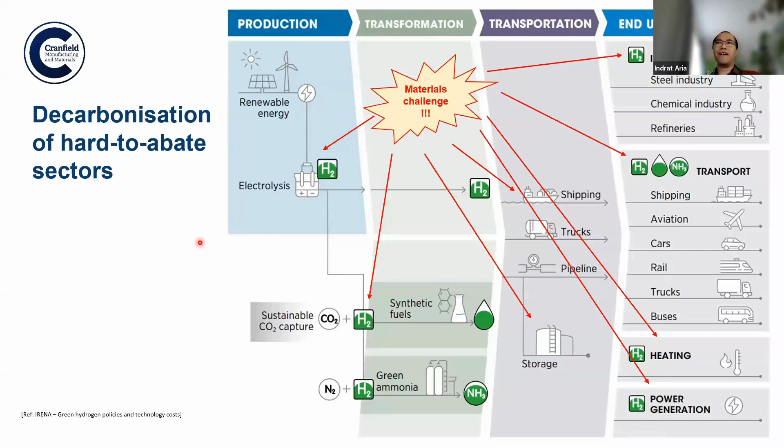I will talk more about the very end points, the beginning and the end. I only have half an hour or so, so I will focus on electrolysis and power generation. Electrolysis is basically splitting water into hydrogen and oxygen. Power generation is recombining hydrogen and oxygen into electricity using a fuel cell. But that doesn't mean we don't have materials challenges everywhere else. We do have challenges in methane synthesis or green ammonia production.

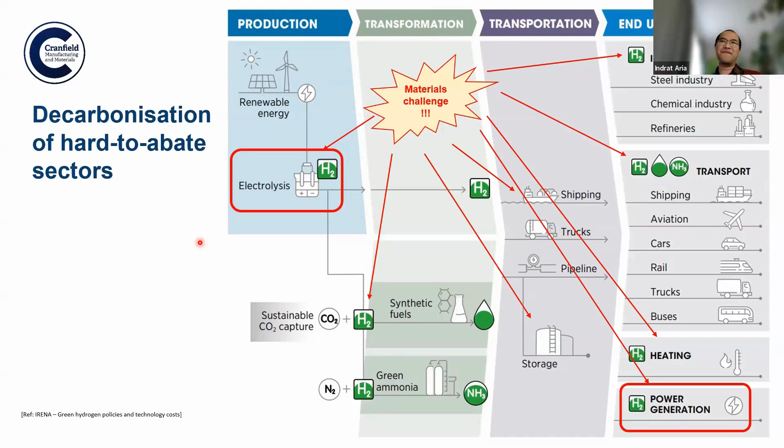In storage, we have materials challenges because hydrogen is one of the smallest, lightest molecules, so it will seep out from the storage, what we call permeation. It embrittles materials, it embrittles steel. If you have steel with hydrogen, the hydrogen goes into the steel and the steel becomes very brittle. But I will not talk about that because I don't have enough time. I'll just focus on electrolysis and the fuel cell.

The reason I want to focus on that is what I call democratization of the hydrogen economy. Dr. Sila already mentioned that many projects are envisioned or ongoing in Indonesia for generation of hydrogen. But I see it slightly differently. Those are large-scale projects, but the good thing with hydrogen is that the efficiency of hydrogen production by electrolysis, water splitting, is the same whether you go upscale or downscale, whether you start with a very small benchtop electrolyzer or very large gigawatt-scale electrolysis. In fact, you can couple it with any kind of power generation.

Just an example here, I don't think this exists, but in my mind, let's say you go to Cirata, there's a floating solar PV, right? So you can tap the electricity directly from the PV. Underneath the PV, you have the water, plenty of water, and then you couple them together, you generate hydrogen, and then the hydrogen can be used as a cooking fuel, as an agriculture fuel, or you generate electricity directly, which can then benefit directly the community surrounding it.

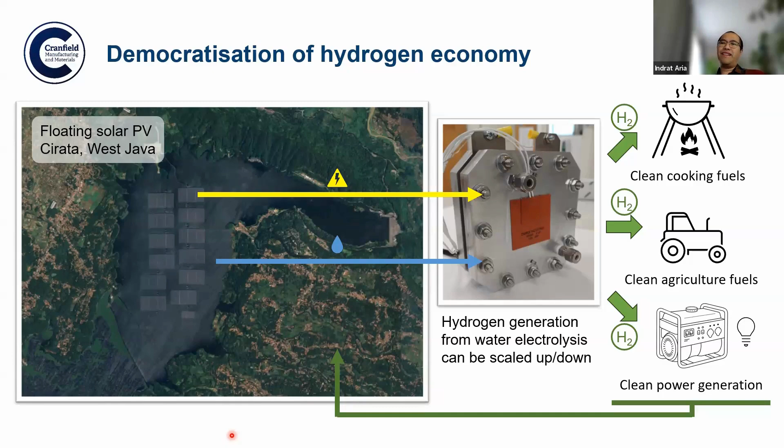And so you don't have to generate and transport the electricity hundreds or thousands of kilometers away. The local community can directly benefit. Now, all of this can make sense if we address the main issue with electrolysis. The main issue is practically the cost of the materials. Priscilla already mentioned that everything is so expensive with hydrogen at the moment.

Yes. So 95% of hydrogen produced in the world is coming from blue hydrogen. So this is basically methane reforming or coal gasification coupled with carbon capture to produce hydrogen. So the hydrogen right now has a cost about, or at least the target for hydrogen cost is between 1.5 and 2.5 US dollars per kilogram. If you use green hydrogen, so hydrogen produced by electrolyzer, it costs about 4.5 to 6.5 US dollars per kilogram.

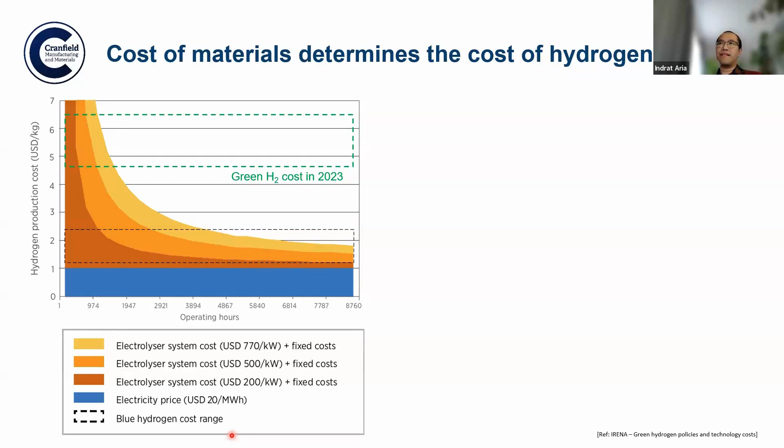The reason for that is because of the very expensive cost of the electrolyzer. And the electricity price, if we say it's a fixed price of 20 US dollars per megawatt hour, then all depends on the cost of the electrolyzer. And if we break down the cost of the electrolyzer, we can see that 34% of the total cost of hydrogen production is coming from the materials, the catalyst, the porous transport layer, and then the membrane electrode assembly.

So those are on the right-hand side that I highlighted. CCM, catalyst coated membrane, PTL, that's a porous transport layer, MEA, that's a membrane electrode assembly. So just these three components basically account for 83% of the capex, capital expenditure of the electrolyzer. So this is key, because if we can drive down the cost of these three components, we are good.

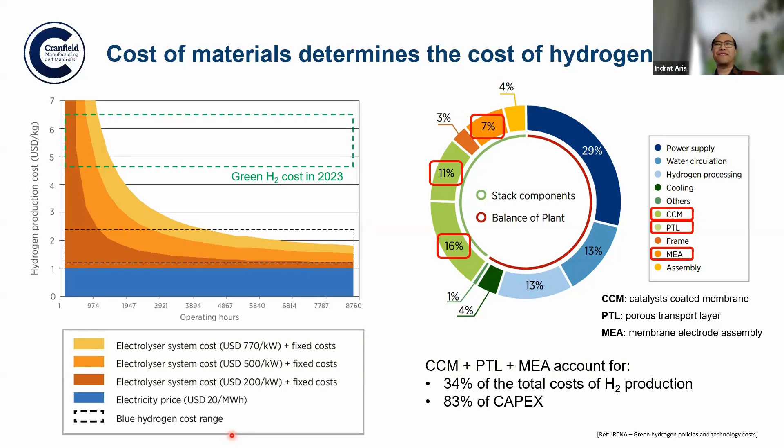We can reduce the capex, the capital expenditure. We can reduce the hydrogen production cost. If the cost is low, everyone's happy. Everyone can use the hydrogen. Right. So I'll mention the electrolyzer and fuel cell. For me, they are the same thing. The only difference is what is the input and what is the output? What do you put in and what do you get?

Right. So, in fact, in my lab we have a cell that can be used for electrolyzer or fuel cell depending on what is the input and the output. On the left hand side, this is the electrolyzer. Basically, you have an anode, cathode, and electrolyte in between. The input is water and electricity. When you power this, you then generate oxygen and hydrogen. So it's basically splitting water.

Now, if you reverse the polarity or the input and output, let's say you put in oxygen and hydrogen, what you get is water. You recombine the hydrogen and oxygen into water and electricity. So for those of you who are interested more in the chemistry side, you can see that this is basically the same thing. Like you have a cathode for the electrolyzer, you generate hydrogen. On the anode, you generate oxygen.

And then if you reverse, you have a reduction of oxygen into O2-, or you have oxidation of hydrogen into protons, H+, on the cathode and anode respectively for the fuel cell. And so those are the same thing. So hence for this talk, I interchangeably say electrolyzer or fuel cell.

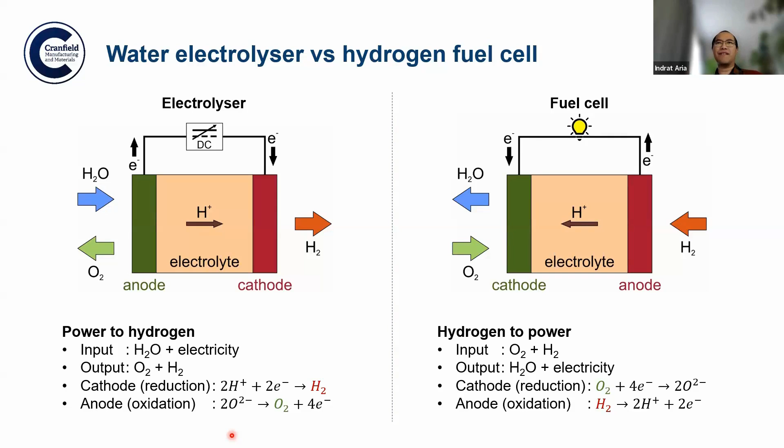So if I say this is for fuel cell, that also applies for electrolyzer. If this is for electrolyzer, this also applies to fuel cell, because in reality they are the same thing. The only difference is just the input and the output, what you put in and what you get. Now, how does it look? This is a benchtop electrolyzer. Basically, in the center there, this is a fuel cell or electrolyzer that has been opened.

So you have an end plate, you have an electrode, and then you have a bipolar plate with a flow field. The flow field is basically to distribute the water. So you can see there's a serpentine-like structure, or this interdigitated flow field. So basically, it's just to distribute the water, and then this will be in contact with the microporous layer. And the microporous layer or gas diffusion layer is basically like a foam where you distribute all the gases or all the water. And sandwiched in between is the MEA, membrane electrode assembly.

Now, whether this is a benchtop or a very large scale, they are basically practically the same. The difference is that you can stack this, just like a battery, you can stack multiple cells to get a higher potential, higher voltage, or higher current, for instance.

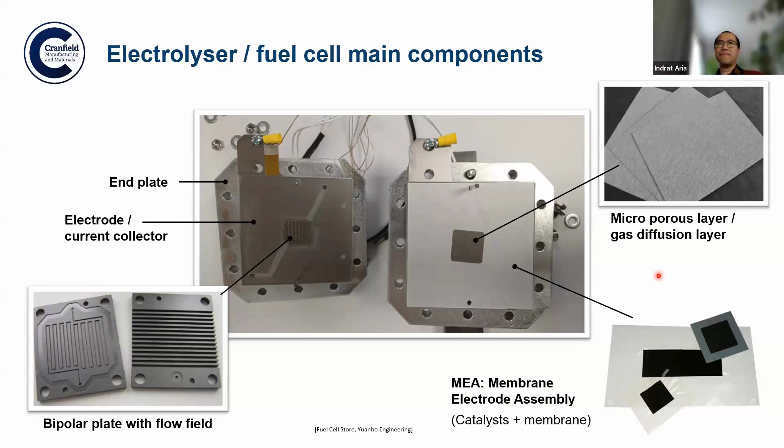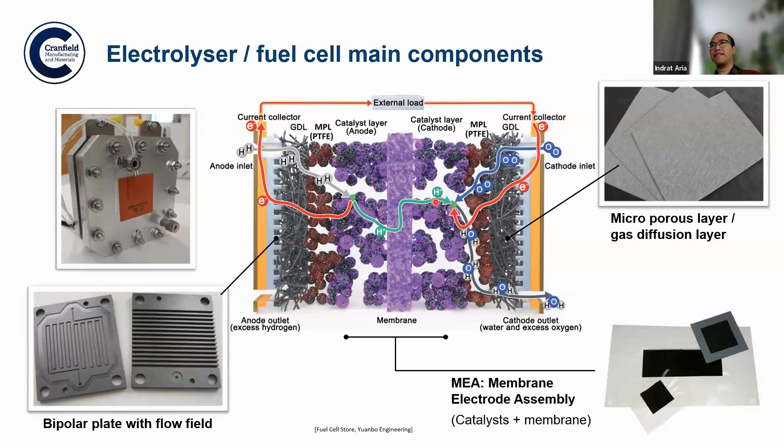So when all of these are stacked together, you can see the electrolyzer on the left hand side. Gas will be coming in from the left or on the right. So for fuel cell, hydrogen on the left and oxygen on the right. And then it will be split by the catalyst and then exit as water. So let's take a look. What are the components? So basically how it works is just electron and ion transport. Everything about fuel cell or electrolyzer is electron and ion transport.

Let's take an example here, a fuel cell. If you have hydrogen on the left hand side as the inlet, and then oxygen on the right hand side as another inlet, hydrogen will travel from one of the inlets through the gas diffusion layer, through the microporous layer, and reach the catalyst of the anode. Upon reaching the catalyst, the hydrogen will be split into protons, right?

And then the proton will be transported through the membrane, and this proton will recombine with oxygen that's traveling from the other inlet. The proton will recombine with oxygen on the catalyst at the cathode side, and upon recombination, it will accept the electron from the external load. So the electron is coming from the other side. The electrons are basically released when we split the hydrogen on the anode. And then the act of recombining proton with oxygen and electron results in water, and then the water will be expelled.

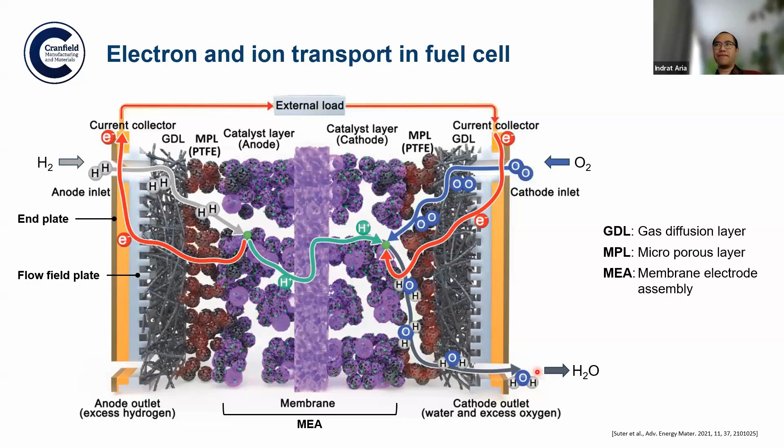So what are these materials? For the microporous layer, this is the interface between the gas diffusion layer and the catalyst. These are basically fluorinated polymer. It can be hydrophobic for fuel cell or hydrophilic for electrolyzer. The reason we want hydrophobic fluorinated polymer is that we want to repel the water. Water is the product of fuel cell, so we want it to be expelled as quickly as possible. We don't want that to create a bottleneck.

And these fiber felts are coated with platinum. This is the reason why it's so expensive. Every single fiber of this has to be coated with platinum. First of all, titanium is expensive. It's abundant, but it's expensive because it's so difficult to manufacture. And second, platinum is very expensive. Why do we need platinum to coat the titanium fiber? That's because platinum is stable in strong acid or alkaline environments, and it is oxidation and corrosion resistant.

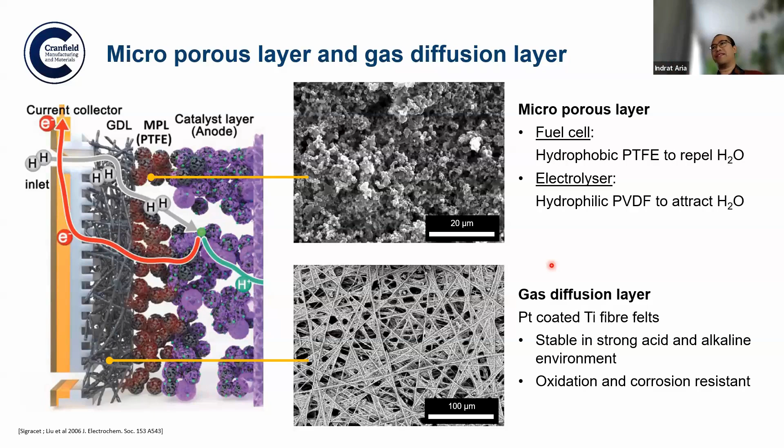Without the platinum, the titanium will get oxidized very quickly. Once it oxidizes, it becomes titanium oxide. Titanium oxide is non-conductive, first of all. And worst of all, it can be corroded. So if you put it on the anode side, the titanium will get corroded very, very quickly. Hence, you need platinum.

If you look at the heart of the electrolyzer or fuel cell, you will find the membrane electrode assembly. This is basically a membrane sandwiched by two types of catalysts, the anode and the cathode catalyst. This is very thin. The membrane itself has a thickness of about 50 microns, and the catalyst has a thickness of about 15 microns each. But without this MEA, there is no fuel cell, there is no electrolyzer. So this is the heart of the electrolyzer or fuel cell.

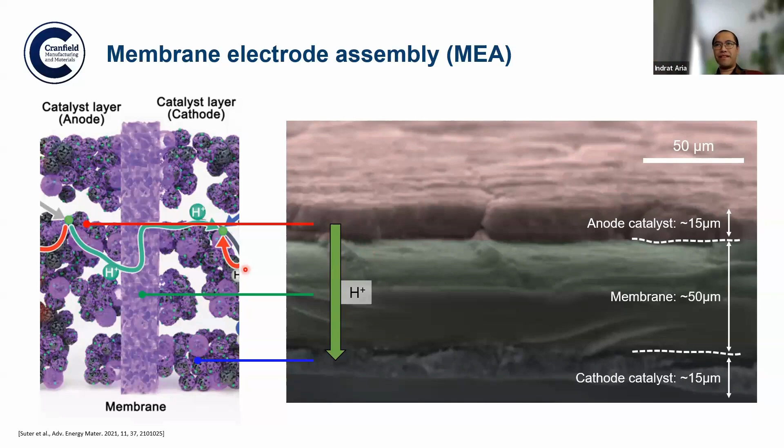This is where you have the transport of H+ or the proton for proton exchange membrane electrolyzer or fuel cell, or the OH- if you use alkaline. So this is very thin, but this is actually very, very expensive. The membrane is made of a perfluorinated sulfonic acid polymer. You perhaps have heard of it by its commercial name, Nafion or Aquivion. So this is a fluorinated polymer with a sulfonic acid terminal group at the end.

The requirement is that this has to be ionically conductive, but electronically non-conductive. So you cannot transport electrons. It has to be blocking to electrons, but it has to be conductive to ions. The challenge here is that the ionomer of PFSA is highly corrosive, highly toxic.

Right? So the manufacturing process is so difficult, such that only a handful of companies, 3-4 companies worldwide, are able to manufacture this. Hence, the cost is very high. And to make it worse, this is non-biodegradable. This is bioaccumulative, right? So PFSA is a challenging material, but without this, we don't have green hydrogen. So this is still a challenge to be overcome.

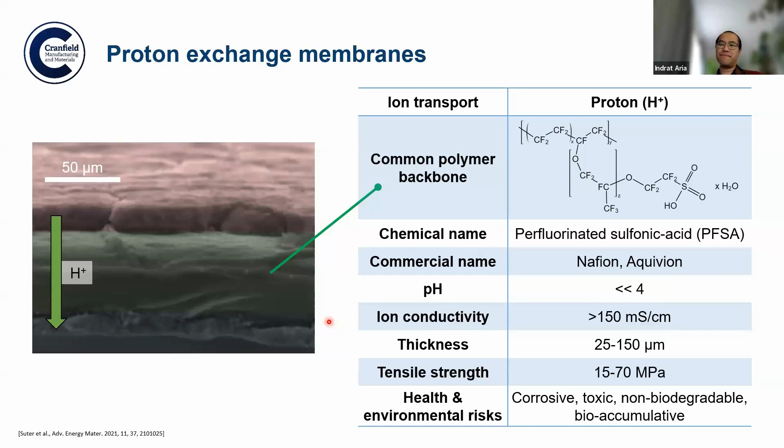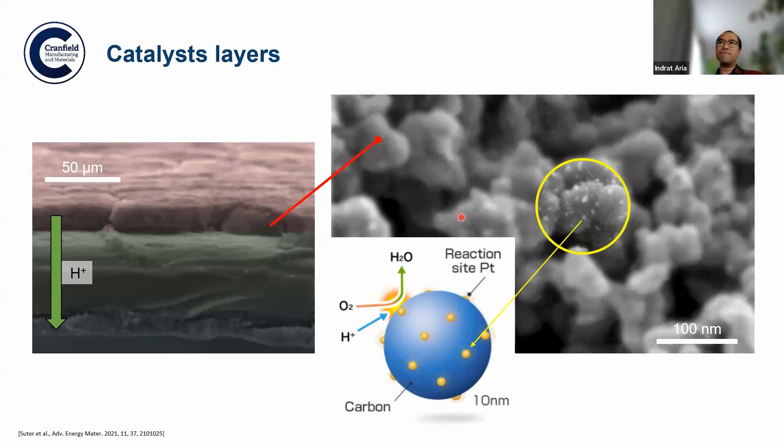Now, to make it worse, in terms of the cost, we have catalyst. Catalyst is also extremely expensive because it's currently made of expensive materials. If you look at the catalyst layer, you will see this kind of structure. These are nanostructures. You have carbon, and the bright dots here are the catalysts. So if I zoom in, most of the material in the catalyst layer is just carbon.

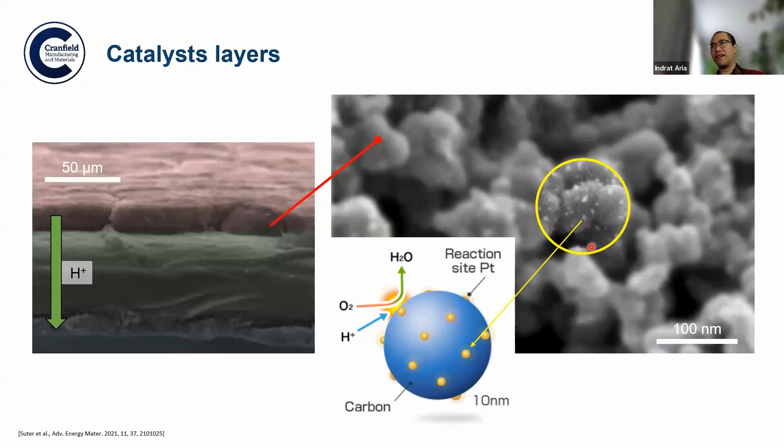Carbon is very cheap. However, this carbon is decorated by platinum. The platinum is the one that's very expensive. So the catalyst itself is the platinum, not the carbon. Carbon is just the structure to hold the platinum catalyst. Carbon is electronically conductive, hence it's a good structure to hold the platinum.

Now, the reason for catalyst is, as I mentioned earlier, you need catalyst to break down the hydrogen gas, H2, into protons on the anode side. And you need to recombine the protons with oxygen gas on the cathode side. Without catalyst, the energy to break down the hydrogen or to recombine oxygen with protons is very high. So the efficiency becomes very low.

We're talking about 20% or lower efficiency without catalyst. It just makes no sense to generate hydrogen without catalyst, and the electricity is better used for something else. But with catalyst, especially platinum, you can easily break down the hydrogen gas into protons, and then the protons can be recombined with oxygen, so that the efficiency of an electrolyzer or fuel cell is usually in the order of 80% or above. So this is the importance of catalyst.

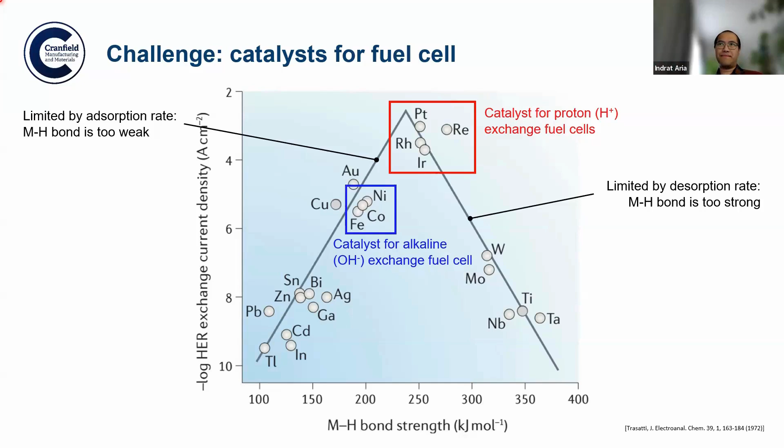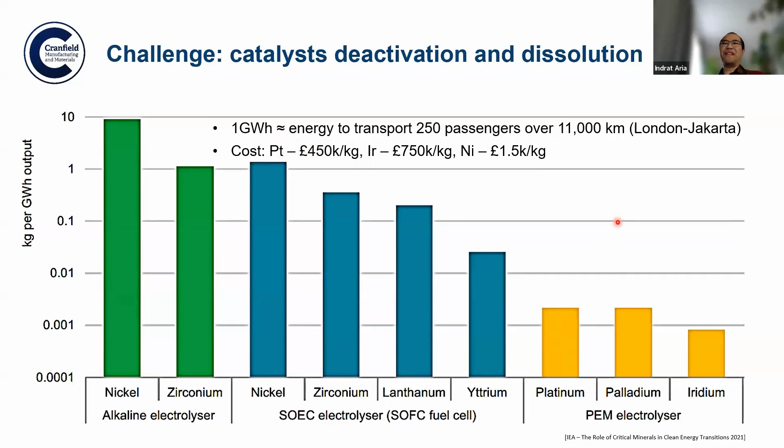However, with platinum, this is the biggest challenge. In terms of cost, yes, platinum is expensive, but nickel is more expensive because of the consumption of the material. The biggest challenge with using platinum, iridium, rhenium or rhodium is not the cost, but the availability, the abundance of these materials.

If every country, every person on Earth wants to generate hydrogen with electrolysis or use hydrogen in fuel cells, there's just not enough platinum, iridium, rhodium or rhenium for everyone. So this will create conflict materials. Nickel, cobalt or iron, even though they are more expensive because of the consumption, are more abundant, so you have plenty of them. So everyone can have access.

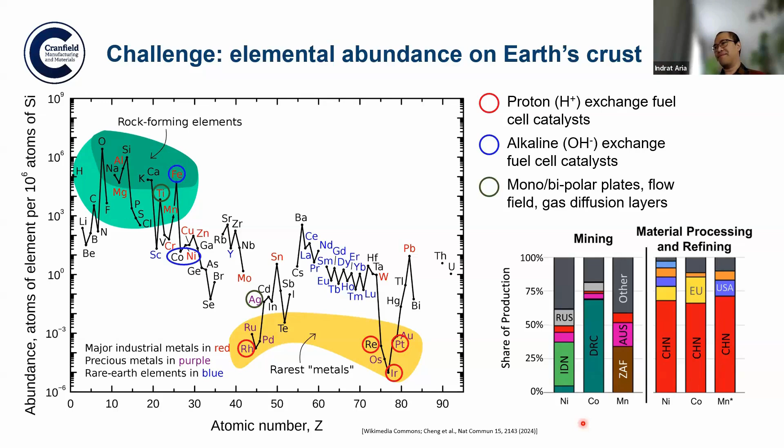The last bit I want to talk about is the activities in my lab. Because of these challenges, the high cost and unavailability of platinum group metals and the high consumption of nickel for catalysis, in my lab we focus on other abundant materials free from platinum or iridium for both the catalyst and the coatings. We want to replace platinum, for example, with niobium carbide or molybdenum carbide,

which are more abundant and cheaper. We want to replace iridium with calcium manganese oxide or nickel cobalt oxyhydroxide, which are again much cheaper and more abundant. The good thing is that because these are oxides, they are stable in oxidizing conditions. So their consumption will be much less than if we just start with nickel metal.

So if we oxidize and create an oxyhydroxide, the research is still ongoing, but we predict that the material consumption will be at least 2, if not 3, orders of magnitude lower than if we just start with nickel metal.

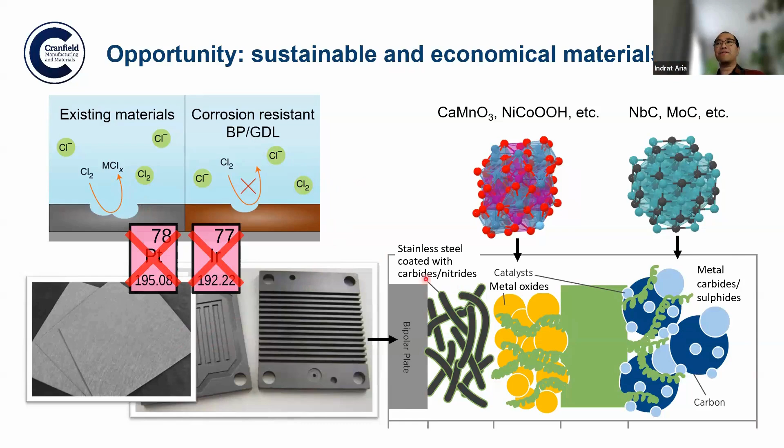This is the reason we traditionally use platinized titanium. Our goal is to replace platinized titanium with carbide or nitride stainless steel. Stainless steel is cheaper than titanium. The methodology we use is high throughput, combinatorial magnetron sputtering. We can mix different materials in gaseous form and then test them in a bench scale electrolyzer or fuel cell.

I would like to acknowledge the funding from the Henry Royce Institute and Innovate UK and our partner Hardide Coatings in our endeavor to discover new sustainable and economical materials for the catalyst and the corrosion resistant coating. With that, we received earlier this year a gold award for excellence in hydrogen research and innovation, and I hope you will see some of our papers published very soon.